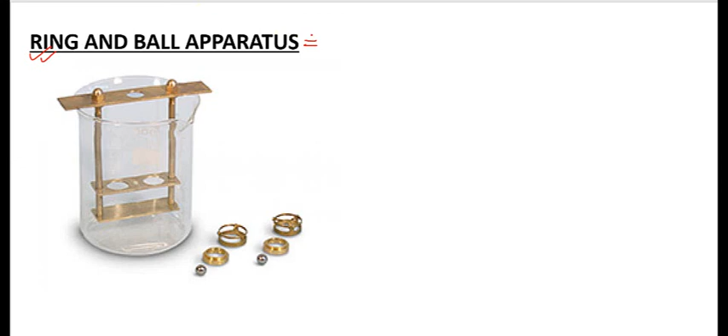Let us start off with the first question: ring and ball apparatus is used in the test of bitumen to determine what? Let us see what ring and ball apparatus is. This is your ring and ball apparatus. Using ring and ball apparatus, we try to determine the softening point of bitumen. So I will show how we determine the softening point with the help of this instrument.

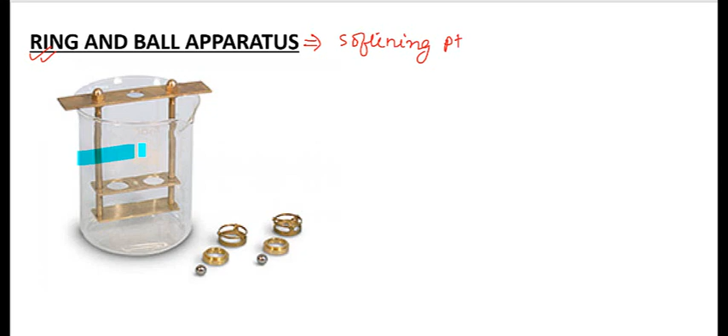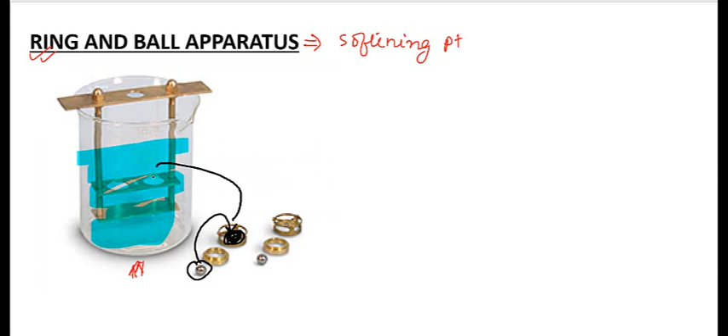First of all, we will fill this jar with water and heat it. We will heat the water. Then we will put the bitumen in this ring, place the balls above the bitumen, and then put this whole assembly here.

We will heat the water. Initially we will heat the water to 35 degrees, then we will also put a thermometer here so that we can note the temperature. We will heat the water at a rate of 5 degrees per minute increase.

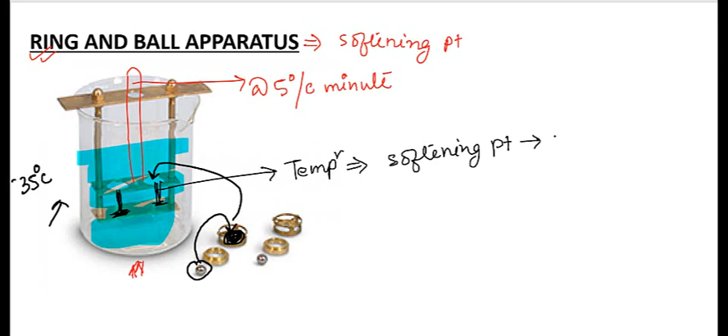After heating to a certain temperature, the bitumen which was here will start to fall off. The bitumen will become soft and gradually accumulate on the bottom plate. The temperature at which the bitumen will touch the bottom plate, we will note that temperature. That temperature will be nothing but our softening point. So softening point is the temperature at which the bitumen attains a certain degree of softness or it softens.

The higher the softening point of the bitumen, the higher grade that bitumen will be. That means its temperature susceptibility will be less - there will be less effect with temperature, susceptibility will be less. So we can use it for warm climates also.

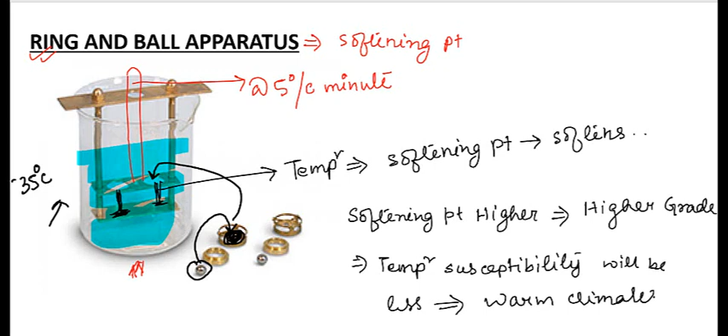So the answer to the first question is: ring and ball apparatus is used in the test of bitumen to determine the softening point. I hope this is clear.

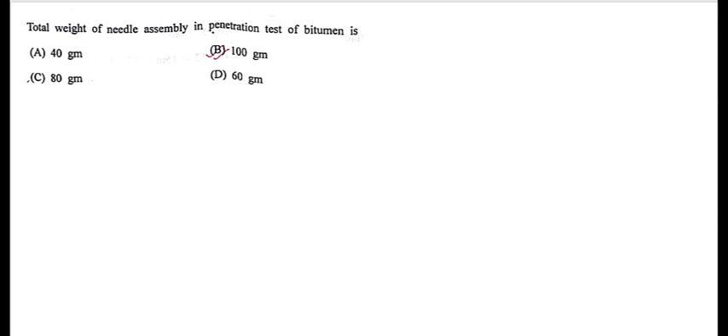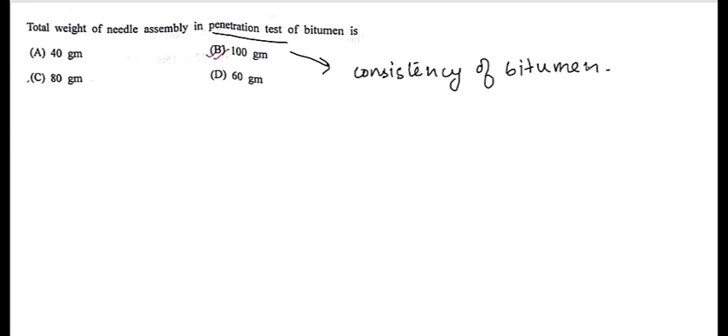See the next question: the total weight of needle assembly in penetration test of bitumen. In the penetration test, we determine the consistency of bitumen. Let us see what the penetration test looks like.

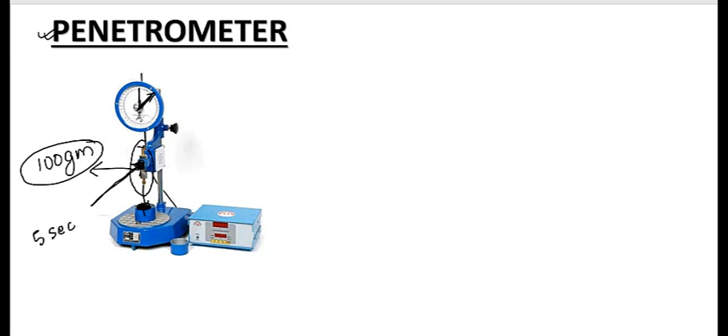Initially there is a press button here - we will press this button and allow the needle to fall. We allow it for 5 seconds. The bitumen will penetrate and we will get a reading showing how much penetration occurred. Suppose the reading shows penetration from 80 to 100 mm.

That means the penetration value is given by 1/10 of the penetration reading. So 80 to 100 means 8 mm penetration. And if we take 100, then it means 8 to 10 mm penetration occurred, when our scale reading was 80 to 100 mm.

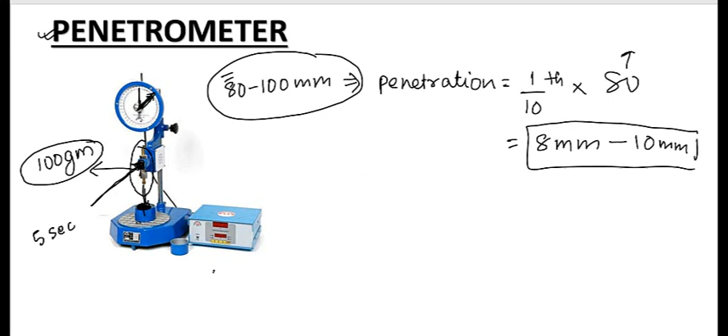And this is in digital form, so we directly get this value here - we don't have to calculate it ourselves. I hope this is clear.

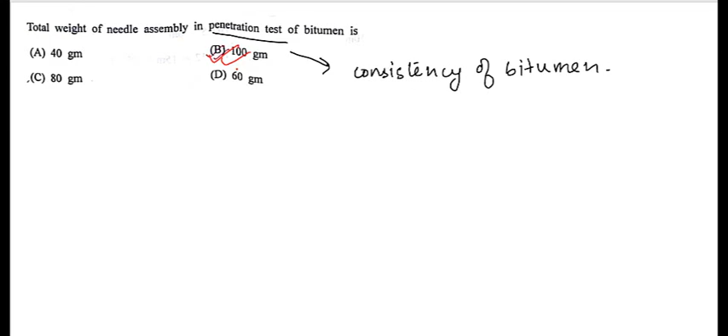Weight means 100 gm, that's the weight, okay. Next question: the bitumen grade is 80 to 100. 80 to 100 means the reading, meaning the penetration is this much. So what was the penetration value here, 1/10 of 80 to 100.

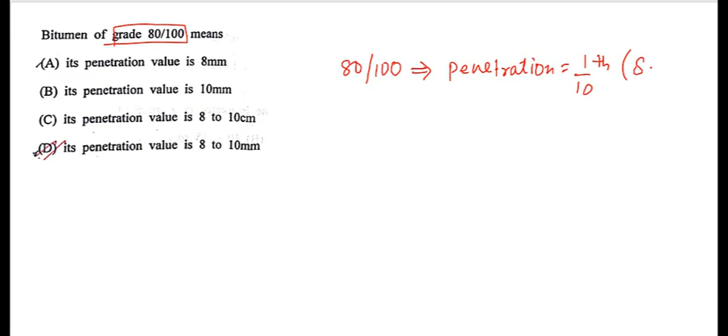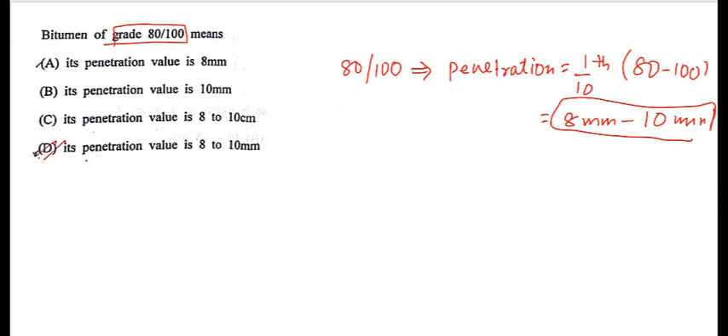That means it will be 8 mm to 10 mm. So its penetration value will be 8 to 10 mm. Option D will be the correct option.

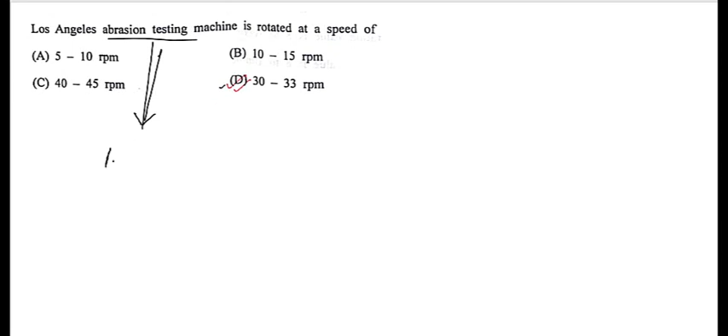Next one, Los Angeles abrasion test machine is rotated at the speed of. Why do we use the Los Angeles abrasion machine? We use it to determine the abrasion value. This is the Los Angeles abrasion apparatus. Here we put the aggregates in this, we can take out this cover plate, and then we fill the aggregates in here.

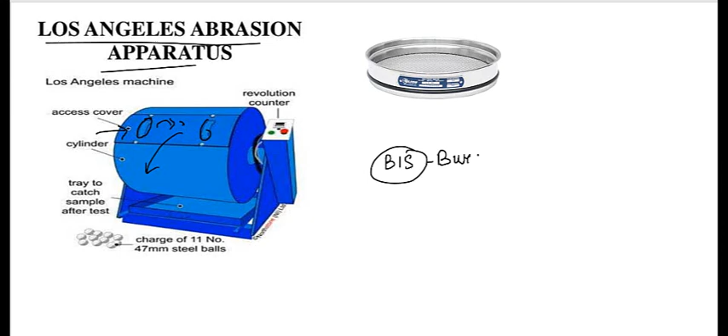Now the aggregates are from Bureau of Indian Standards or BIS, that is your Bureau of Indian Standards. So Bureau of Indian Standards gives us 7 sets of gradings, okay.

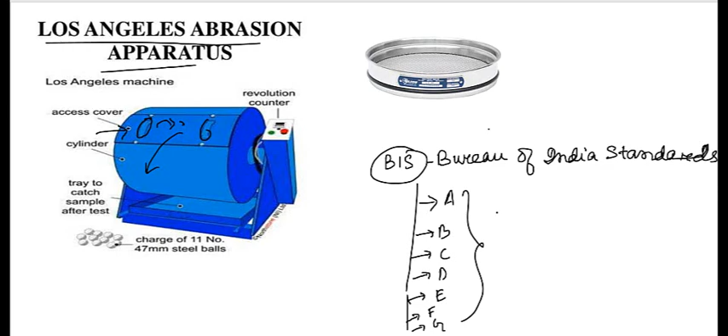Gradings A, B, C, D, E, F, G, okay, 7 gradings are given. 7 gradings means we mainly take 5 kg, meaning it gives us the aggregates grading, okay, and also tells us the number of charges to be used.

Number of charges means the steel balls we place, how many and what size steel balls we place here with the aggregates, okay, how many kg of aggregate we take, what size of aggregates we take - these gradings are given by Bureau of Indian Standards.

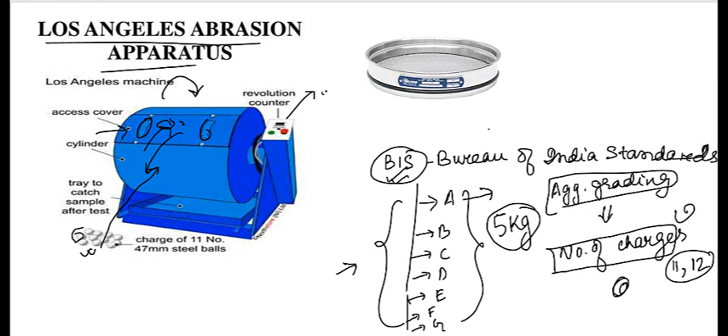We will rotate this drum at 33 rpm, okay, and the number of revolutions we give is 500 to 1000, okay.

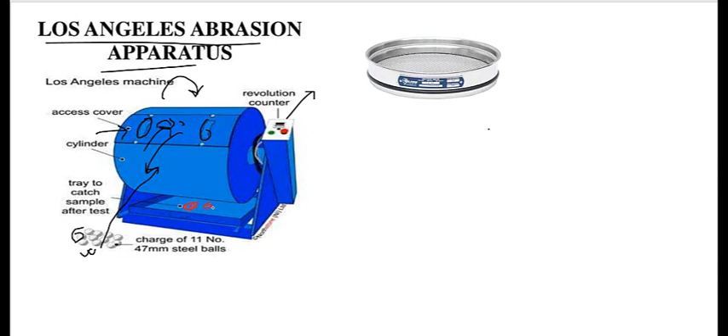After 500 to 1000 revolutions the crushed aggregates are collected here. Then what do we do - we take these aggregates and put them on this sieve. This sieve size is 1.75 mm, okay.

And we will sieve the material, whatever material passes through, we will take the weight of the passing material, say W2, and the original weight of our aggregates was W1, the weight we had taken of the aggregates.

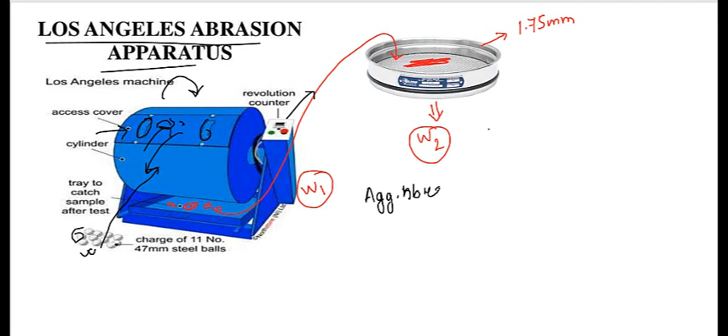So the aggregate abrasion value will be given by the ratio of W2, that is the weight passing through 1.75 mm sieve, divided by original weight, into 100, okay.

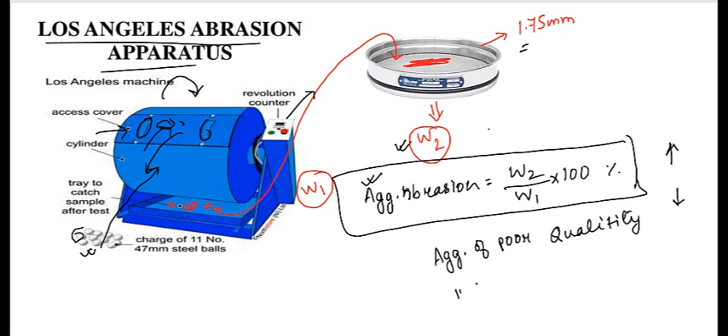So by this we will calculate the aggregate abrasion value. So the greater the aggregate abrasion value, we can say the material or aggregates are of poor quality, okay, and the lower it is, the aggregates will be of good quality, okay.

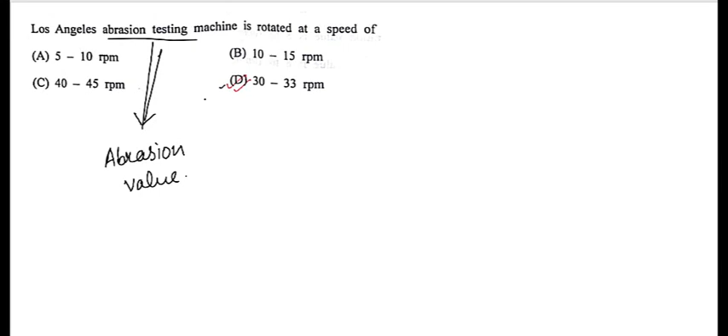So it was asked, the Los Angeles abrasion test machine is rotated at what speed - 30 to 33 rpm, okay. So next question asks, which of the following test measures the toughness of aggregates, okay.

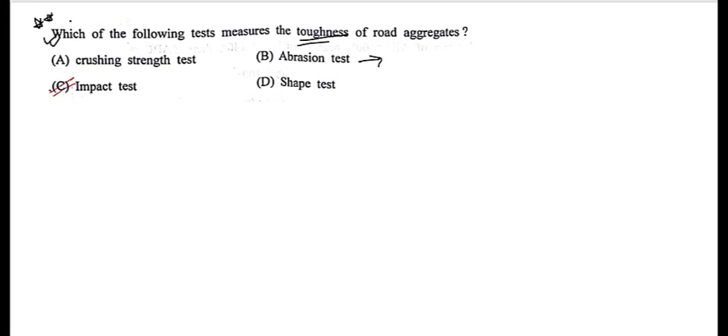Okay, so this question is very important, I've seen this in many question papers, even in GATE this question comes. So this is very important, you should always remember that. From the crushing strength test what do we get?

From the crushing strength test we get the strength of aggregates, so how much strength or how much load the aggregate can take, okay. Next, what is the abrasion test?